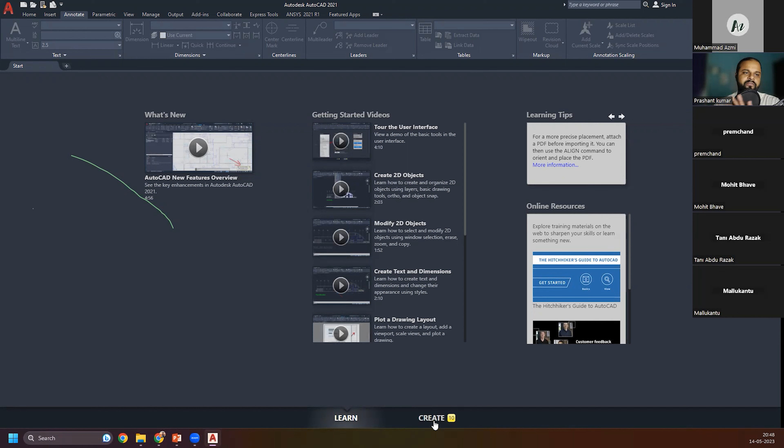So this section is basically towards your learning capabilities. If you want to start learning, you can just go to this section. Otherwise, if you are into AutoCAD to create something, just go to the create panel all the time. So here you can see right now we are in the create panel.

Here on the top left corner, if I click on the AutoCAD logo, I'll get a few options, like start a new drawing by clicking on new. If I want to open any old drawing, I can do that as well. If you want to convert any drawing to DWG, I can do that as well. So these are the few options.

If you click on this AutoCAD logo, you'll be able to see those same things over here as well, like if you want to create a new document, you can do that from here as well. If you want to open something, you can do that from here too. So all these options are here, and here also.

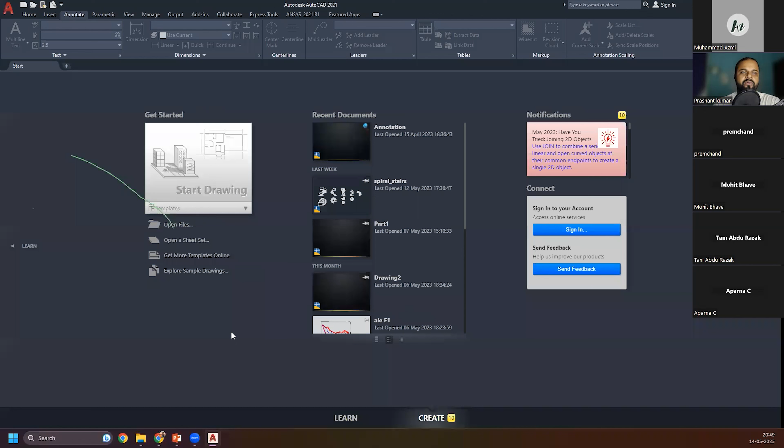Now, what happens in the case of AutoCAD drawings, in case of 2D drawings, is it works with a template. By default, AutoCAD provides lots of templates for different kinds of industries. Just below your start drawing panel, there is a template panel. If you click on this small dropdown arrow, you'll be able to see all the templates provided by Autodesk by default.

These templates are basically inclined towards different kinds of industries, like a few templates for the architectural industry, a few templates for the civil industry, a few templates for the manufacturing industry. So there are multiple predefined templates.

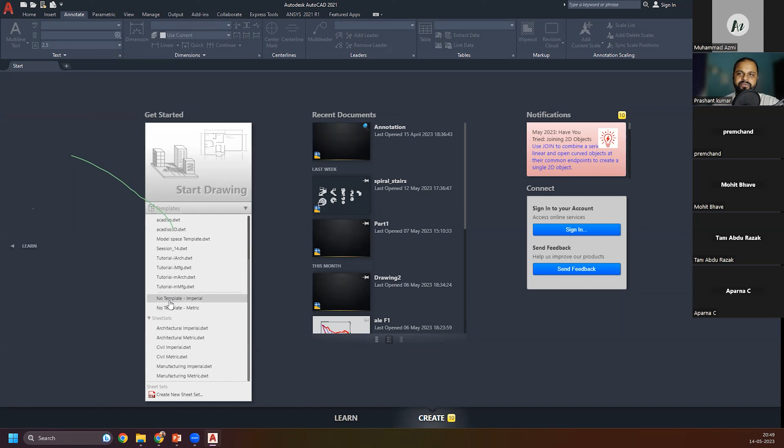Now, if you're not sure which kind of drawing you are going to start, or which industry you're going to start your drawing in, then you can also select no templates. There are two no-template drawings, one for imperial units and one for metric. When we talk about imperial, this means feet and inches. When we talk about metric, this means meters, centimeters, and millimeters.

So if you are in an industry that works with imperial units, you can select this one. And if you are from a metric industry, you can select this one. So let's select this one to start a new drawing.

I will select this one. And the moment I click on the metric template here, you can see my new drawing has just been launched. So this is my drawing that just launched, and it's completely empty.

As you can see, my background is also black. Maybe somewhere you had seen some AutoCAD tools having a white background. That is completely customizable, guys. You can completely customize that thing, so don't worry about it. Right now I've just customized this for the black background.

Right now here you can see my cursor as well. The cursor size can also be customized. As you can see, there are two lines in my cursor and a small rectangle at the center. This is my default cursor inside AutoCAD.

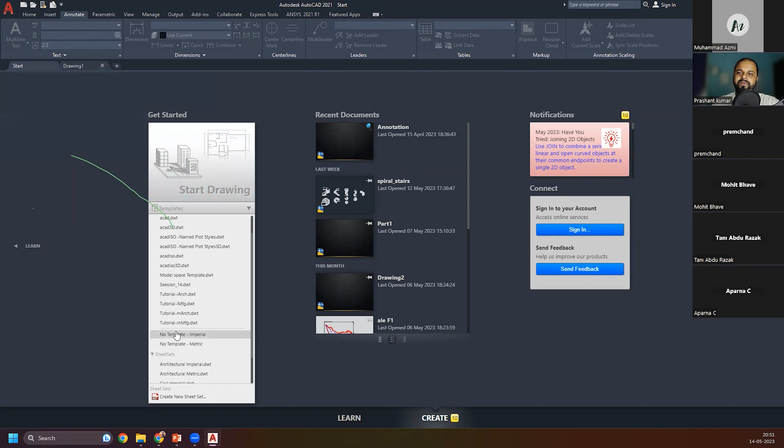The moment I clicked on the template here, you can see drawing one just got active. So this is my drawing. And all the time, if you want to go back to your start panel, you can go that way as well. Here you can see drawing one is right now active. If I click once again on the new template, it will create another drawing here. I will close this one because I don't need it. So we are into drawing one space right now.

Just a second, guys. In every AutoCAD, whenever you launch your drawing, you'll be able to see these spaces. Can you see that? Can you guys see my screen? Comment in the chat box, guys. The reason I'm asking all the time is because it's really late, it's time to sleep, so I just want to make sure everyone is awake in this complete session, in this complete workshop.

So here you can see, right now the moment I clicked on the template, I moved on to this model workspace. We are inside this model workspace. And there are two more workspaces over here: one is layout one and the other is layout two. Whatever is started with this word layout. This means that is the paper space, and that space is to plot your drawing, to prepare your drawing for printing, for plotting.

So the basic design and drawings, all these stuffs, we are going to do only inside this model space.

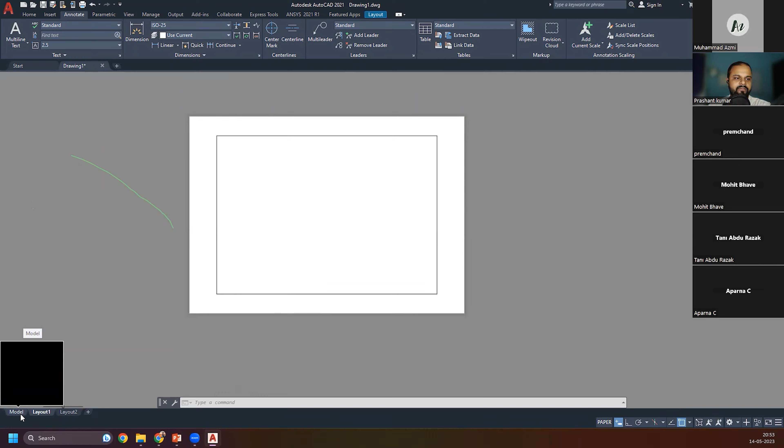Here you can see inside this model workspace. And now on the top, you can see all tools are active right now. It's all because we had an active drawing with us, so all the tools are active right now.

Here you can see there are multiple tools and it's really scary. When you come into AutoCAD the first time, you will see lots of tools and get confused where to go, where to start, because there are lots of tools over here. But it's really easy, guys, don't be horrified by seeing such kind of user interface. It's really simple to use. You don't even need to know about any of the tools. You can completely control your AutoCAD using the command bar. And when I say command bar, don't get confused that I'm going to use programming or some other steps. There are small shortcuts that we can use.

Now Mohit is asking what is the use of these layouts. So I told you these layouts are for the printing purpose. I will explain you as we move forward in this workshop.

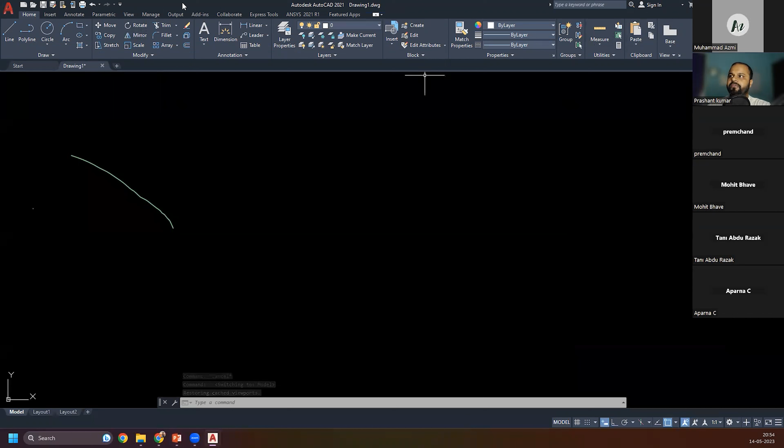Okay, so we were talking about the user interface. So at the top, we got all the tools. Here you can see at the bottom, we got a few more controls, like we can control a few of the settings from here. Like if I want to turn on my grid mode, I can turn it on, I can turn it off like this. Here you can see this is the grid mode that is active on my drawing. And grid snap, we can turn it off, turn it on. So these are the settings. There are lots of settings over here that we can control.

Then here we got the model space, layout space. So if you want to navigate across these spaces, you can just click on the different spaces and you will be able to get inside that. So all the drawings, all the designs, you will be doing inside the model space only.

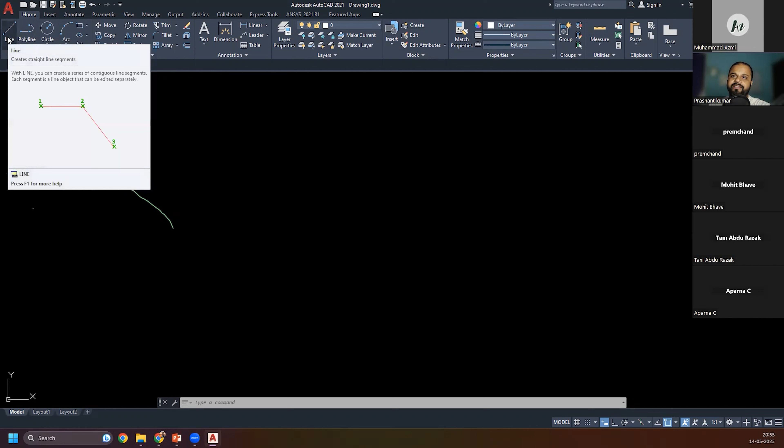Now, here you can see at the bottom of your drawing space, there is a command bar. Here you can see it's asking me to type a command. So this area is really very important. So whenever you are using AutoCAD, try to look at this area, what it is asking me. For example, let me activate the line tool. So you can activate all the tools on your user interface just by making a single left click. So here you can see whenever I'm hovering over the tool and staying for a few seconds, it is already giving me lots of information. So that is also a great way to learn all these details.

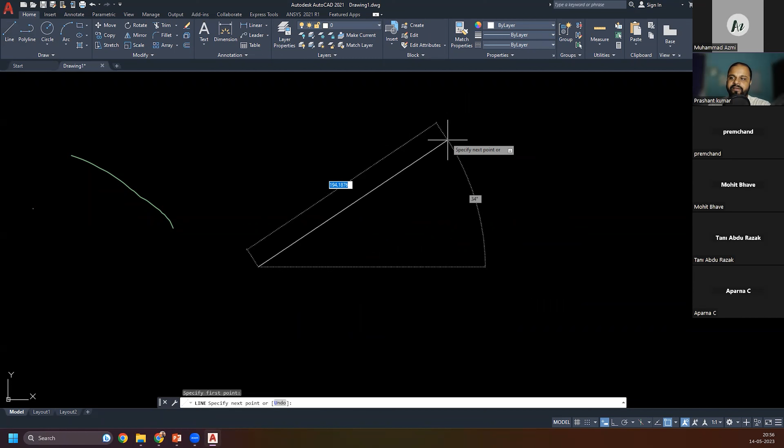So as you can see, the moment I activated the line tool, you can see in the command bar what it is asking me: specify the first point. Line tool is active and the moment I click, I have specified the first point. Now to create a line, I need to specify 2 points. So now it is asking me to specify the next point. The moment I click, I specify the next point. I will click, I will specify the next point. Here you can see the moment you are done, you can just press escape on your keyboard.

Escape key, guys. Escape key is the key to come out of any tool. Also, you can make a right click and click on enter to come out of the tool. But escape is very handy. All the time you have to keep your fingers on the escape key. And whenever you are done with the command, you can just press escape to come out of the tool. There you go. So I just created this shape.

Now, as you can see, I am zooming in and zooming out on my user interface, and it's all possible because of my mouse scroll wheel. And guys, don't try to do AutoCAD designing or drawing using the trackpad on your laptop. It's almost impossible, I will say. Maybe with a few years of practice you can do that, but that's not a really efficient way to do designs inside AutoCAD. Always use a good external mouse. So here you can see if I'm scrolling my wheel forward, backward, I'm able to zoom in and zoom out on my drawing.

Also, if you want to pan your drawing, like if you want to move your drawing across your screen, you have to click on your mouse wheel, and once you click on your mouse wheel, you will be able to see this hand icon, that is the pan icon. The moment you keep pressing that wheel, you will be able to move your drawings across your drawing space. Here you can see, like this. It's very easy.

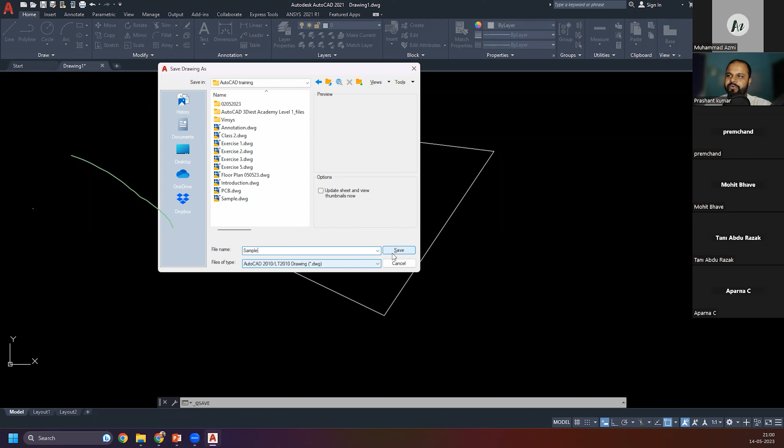Now click on save. Since I already had the sample file, I think yes, it already had, I will just press yes to replace that drawing. And here you can see it got saved and the file name got updated. So we just saved our first AutoCAD drawing that we had just created. So this was about the user interface of our tool, right?

And on the top tool panel over here, you can see in the home tab we got different kinds of tool panels separated by these borders. We got the draw panel where we will get all the tools related to drawing anything. We got the modify panel to modify anything. We got the annotation panel to annotate your drawings, for example, dimensioning, putting some text or something like that. We got the layer panel, block panel, properties panel, group panel, utilities panel. So there are lots of things that you will learn over time.

So don't worry about that at this moment, because if you want to learn AutoCAD, it will take you around 24 hours of full training. This tool cannot be learned in a single hour of workshop, but still if you can get a good introduction to this tool, you will get a good path to start your journey with AutoCAD.

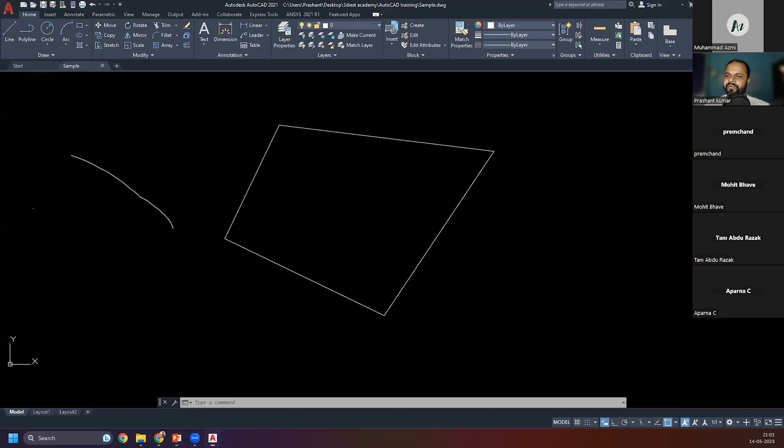inside our sample file. Before that, I will select this thing and delete it by using my erase tool. Here you can see. Now we want to draw two concentric circles. It's simple, guys. We have to go to the draw panel to draw anything. So we'll go into the draw panel, and here you can see we're able to find our circle tool. Just click on that tool to activate your circle tool.

And the moment you click on the tool, you have to look inside the command bar to see what it is asking you to do now. As you can see in the command bar, it is asking me to specify the center point for the circle. So I will make a single click to specify the center point. There you can see.

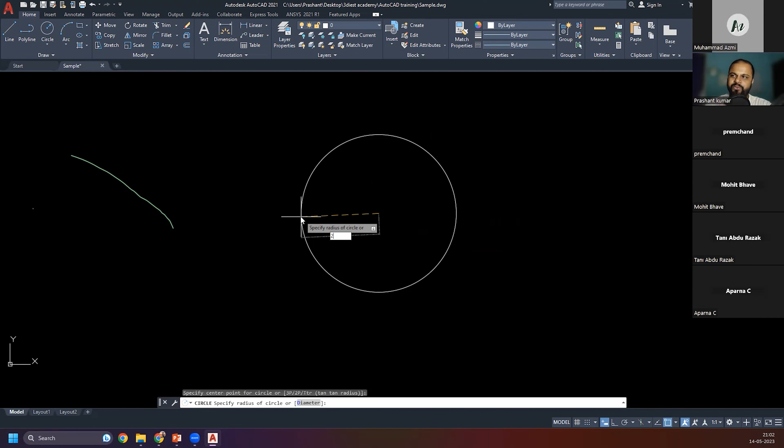Now it is asking me to specify the radius of the circle. So definitely, guys, the diameter was 4 millimeter, I told you, so the radius will be definitely 2. So I will press 2 on my keyboard and will press enter. Boom, circle has been created.

I will just zoom in, here you can see. This is my circle that we had just created. I'm able to pan that as well. So if I select this circle, it will highlight the center point, and it will highlight all the four quadrants of this circle. You can call these quadrants, you can call these snap points, whatever you want to call. But this is the center point for the circle, right?

So we just created this circle, and I told you, if you want to come out of any of your commands, just press escape on your keyboard and you are done. Now we have to create one more circle, and that is of diameter 7. Here you can see diameter 7. So again, we'll activate our circle tool from over here, and I will try to find the center.

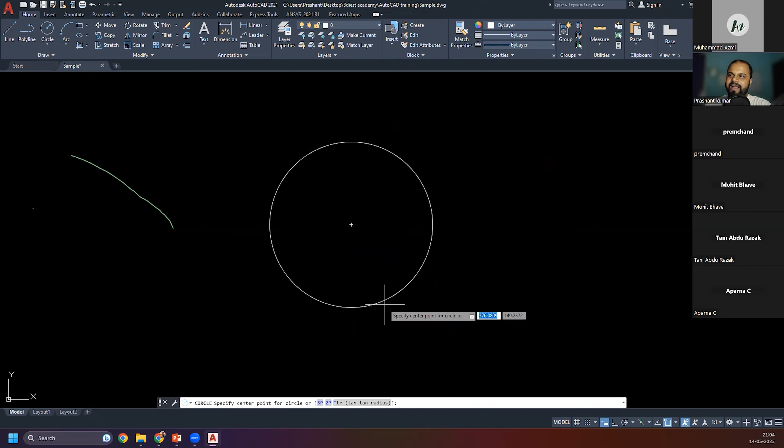Here you can see I'm not able to find the center because there is a tool for it that is not active at this moment. AutoCAD is intelligent; it should automatically suggest you the center point, but it is not suggesting me, right? So whenever I'm highlighting the borders of this circle, it is highlighting the center as well. So now I can just move near my center, and it will automatically snap onto that point. And the moment I feel it's snapping onto the center of my circle, I can just click and make another circle.

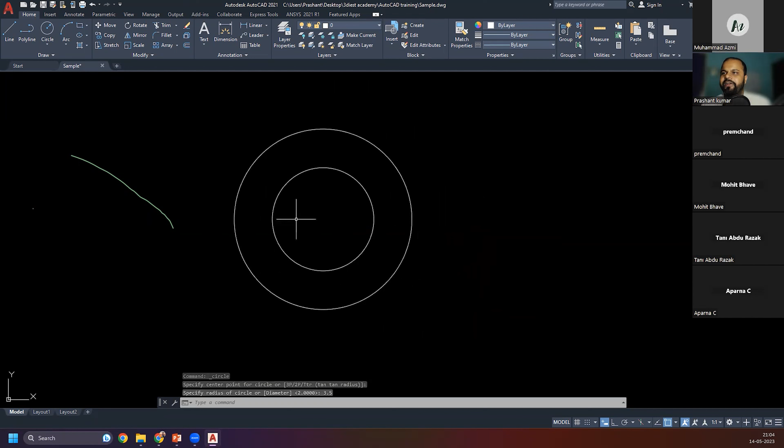And that is of 7 millimeter diameter, so the radius will be 3.5, and we'll press enter. There you can see. So we have just created two concentric circles. One is 7 millimeter in diameter. One is 4 millimeter in diameter. And how to make sure that these diameters that we created are correct?

So there is a way, guys. Just select the object that you want to check. To select your object, just click on the object. Here you can see I just selected it. Then just press Ctrl+1 on your keyboard to open the properties of that particular object. So I will just press Ctrl+1, and here you can see the properties panel just opened. And inside the properties panel, I can see my diameter. It's 7, radius is 3.5.

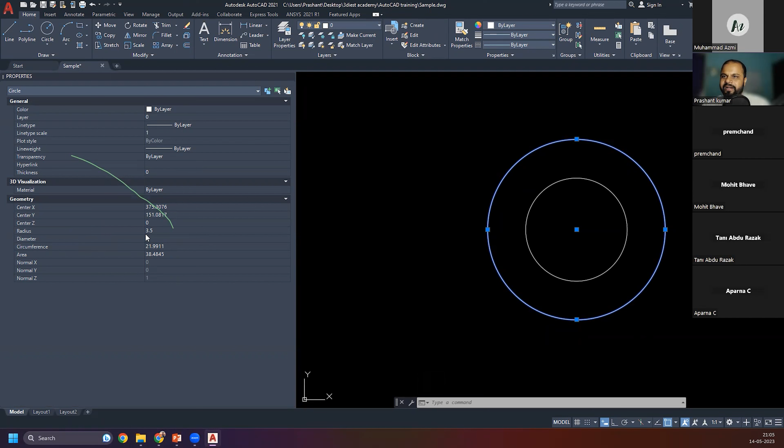Now press escape to unselect that. Now select the other one. Here you can see for this circle, the radius is 2 and the diameter is 4. And if you want to close this properties panel, use the same keys on your keyboard, Ctrl+1 again. Here you can see, like this. It's simple. It's really easy to do these things inside AutoCAD.

And I can see someone is asking, how do we find the zero axis system origin? There is no need to find the zero axis system origin, guys. I told you, AutoCAD is like a paper. You can start from any point of your screen, right? You don't need to find the zero origin like we used to do in other 3D CAD software. Just start your drawing at any point on your screen and start doing the things. There is no need to do that stuff when you are just starting AutoCAD.

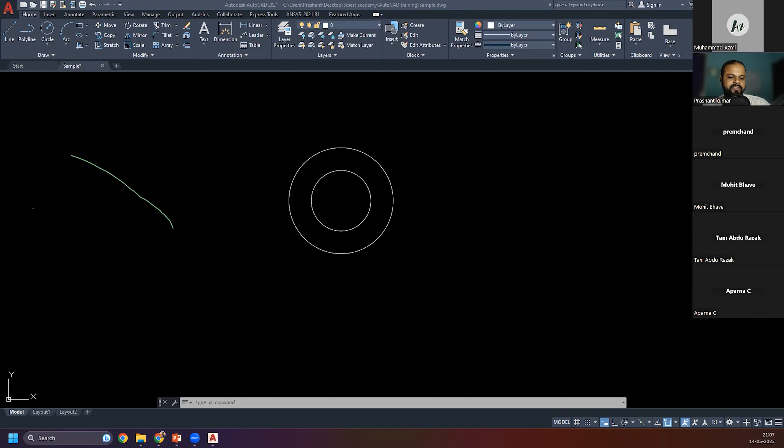Here you can see we have just created these two circles, right? Now, the next thing that we had to do is we had to create another straight line, as you can see over here, that is 3.5 millimeter from the bottom of this center of the circle. Here you can see 3.5 millimeter at the bottom. We have to create a straight line, then another straight line at the bottom, that is 2.5.

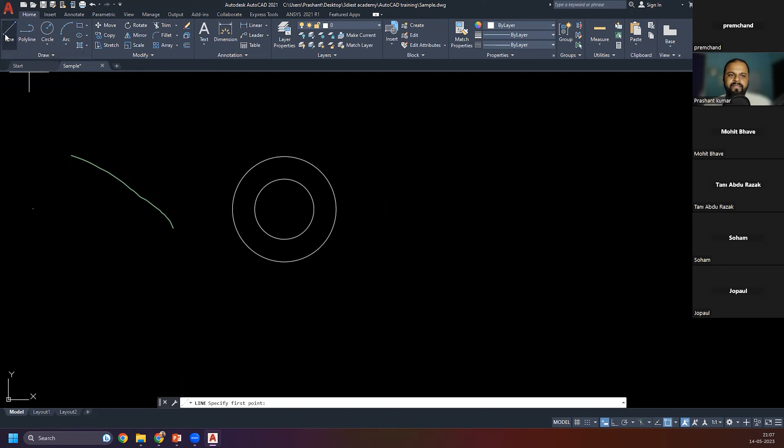So for these two lines that we are going to create, we are going to use a simple process. And what is the length of the line, guys? I forgot to check. It's 10, right? It's 10. So first thing first, I will activate my line tool. And all the time I told you, if the view zooms out, how to fix the view.

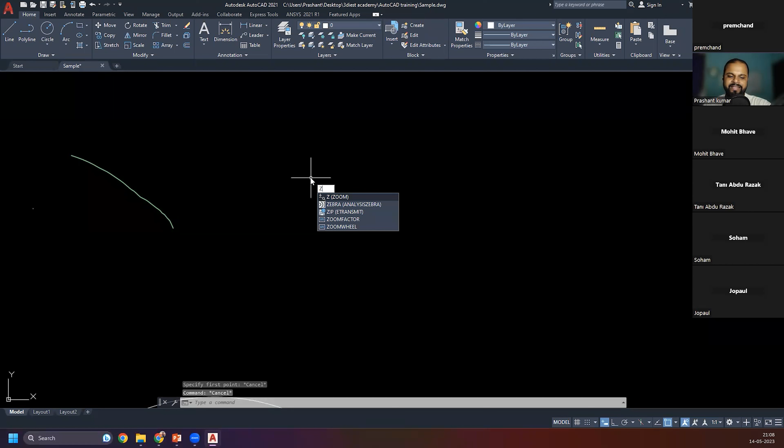Someone is asking, if you had missed your drawing from your screen, how to bring it back on your screen, right? That's a really good question, because when you are starting AutoCAD, that's the biggest problem. So just press Z on your keyboard to activate your zoom tool, press enter. Then press A to zoom all. Whatever you had created on your screen, it will get zoomed all.

Here you can see we got the things highlighted over here. Now we can zoom it in like this. So just zoom, enter, A, enter, like this. It's easy. So now we have to create a line of 10 millimeter length. So I will activate the line tool from over here.

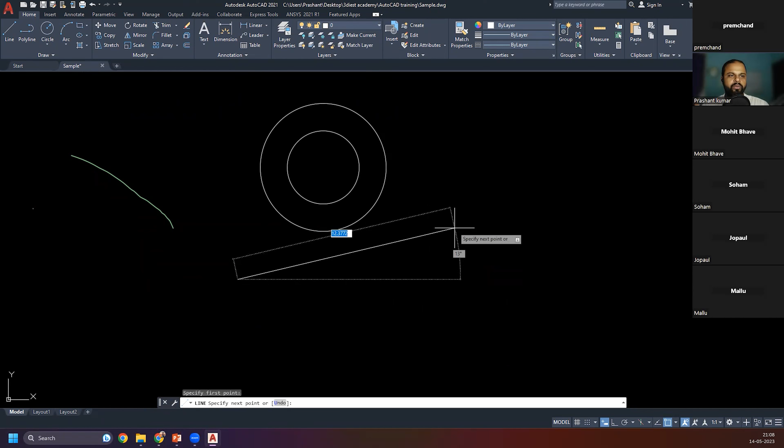The moment I clicked on the tool, it is asking me to specify the first point. I will select the first point, and I want a perfectly horizontal straight line, but at this moment I'm not able to do that because it's going on some angle. So there is a tool inside AutoCAD to make perfectly horizontal and vertical straight lines. So you need to activate that tool.

So I will activate this tool called ortho mode. Ortho mode is the tool that will help you to create only horizontal and vertical lines. The moment I activate this tool, I am able to create only horizontal and vertical lines. It's not moving on any particular angle. So now I want this line to be 10. I will just type 10 and press enter. There you can see, I just created a line of 10 millimeters.

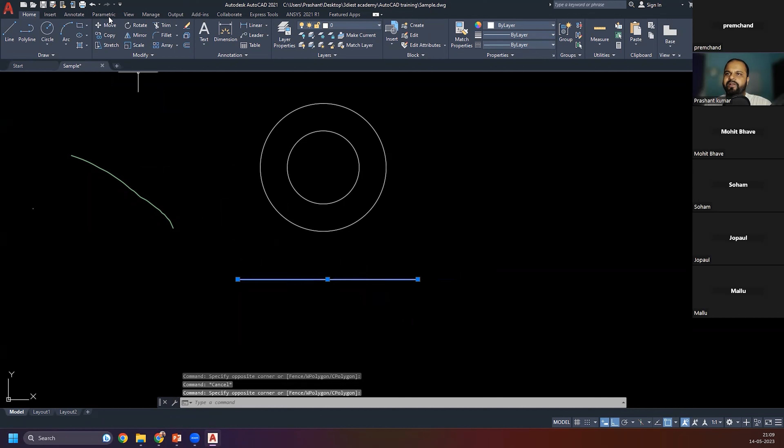Now I want this line to be touching this circle at this bottom position. So I will select my line just by making a single click, then dragging my cursor, and it will make a green window like this and select my line, right? Then I want to modify this line to touch onto this circle, so I will activate my move tool.

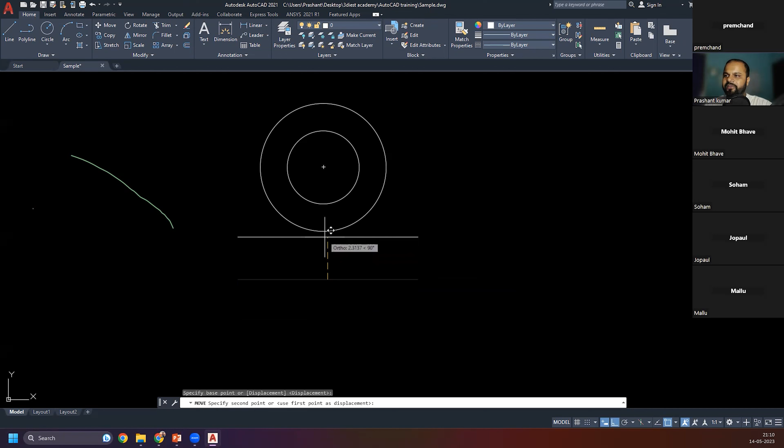Now I will specify the move point. Whenever I hover my cursor onto the midpoint of the line, it automatically gives me the suggestion; that triangle green icon is for the midpoint. So I will select that. Then I will move this to my circle's bottom quadrant. It automatically gives me the suggestion that the rectangular symbol is for the bottom quadrant. So I will click on that.

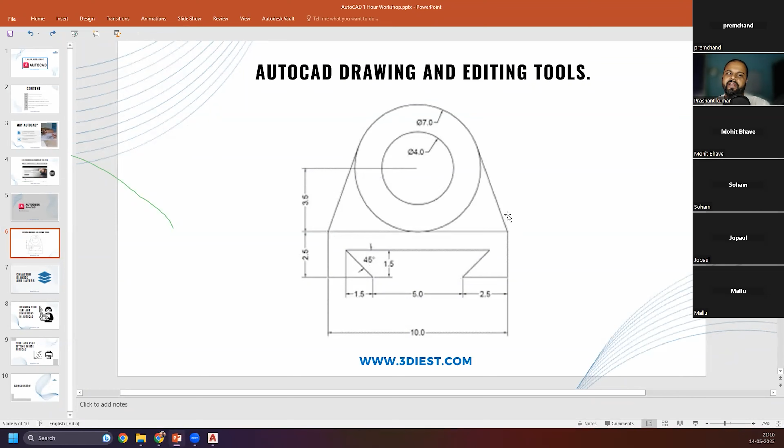There it goes. I just moved my 10 millimeter line from here to here because we wanted this line at this position. Now I will check my drawing: I want these connected on the left and right with two lines. So I will again activate my line tool and select the first point of the line as this corner.

Now the other point I want at the tangent of this circle. The tangent is basically a line that is touching the other object. So how can we do that? Press shift and make a right click, and then you will be able to see your tangent tool.

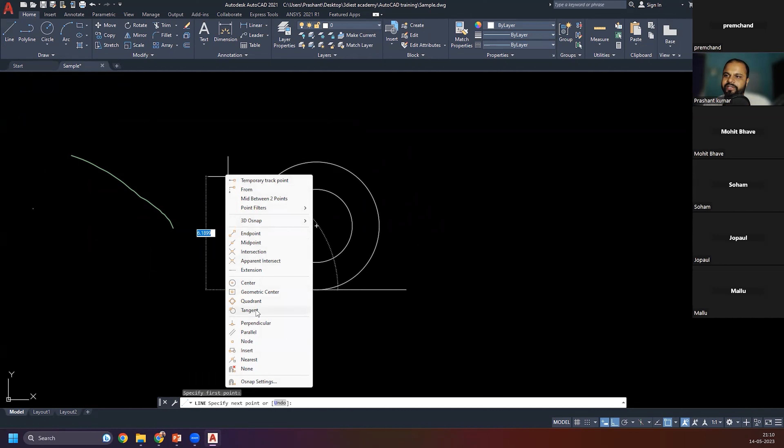So just activate that. And now if I try to go over there, it will automatically snap to the tangent point, here you can see. And the moment I click, it will make a tangent. And the moment I am done, I will just press escape on my keyboard, and I am done.

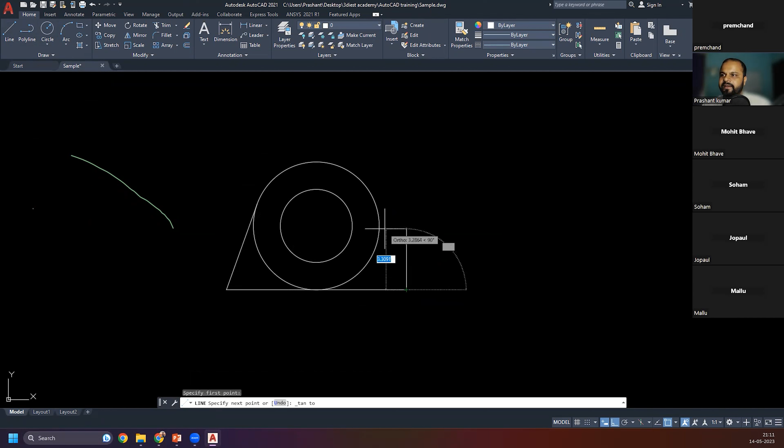Again, activate the tool, select your point, press shift and right click and select tangent, then try to move near to your circle and then click like this. So it's perfectly tangent to your circle. So this way we have created these two simple lines.

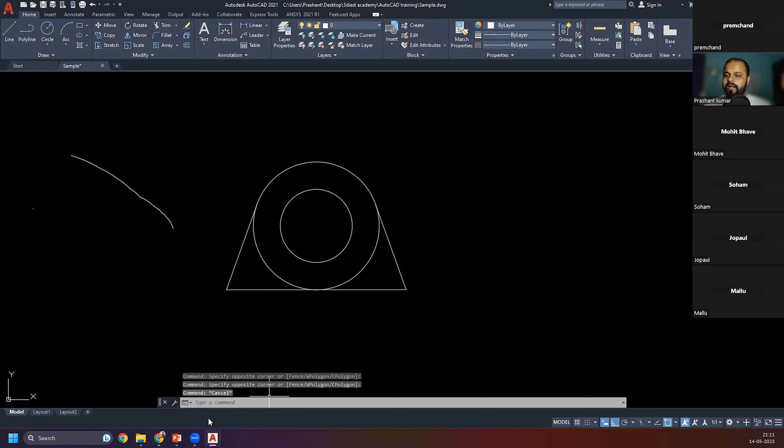And I told you all the time, whenever you are using any of the commands, any of the tools, try to look into your command panel at what it is asking you. Because if you move your eyes somewhere else, you will not be able to perform the commands correctly. The only way is to keep looking into your command panel. Right? There you can see we have just created this.

Now we need another line 2.5, then another line like this. So let's do that. I will activate my line tool. I will make a line of 2.5 like this. Then I will go in this direction 10, and then again towards the top 2.5, and it's closed. Now there are a few more lines, like we need a line 1.5 millimeter from the bottom, and then these lines, right?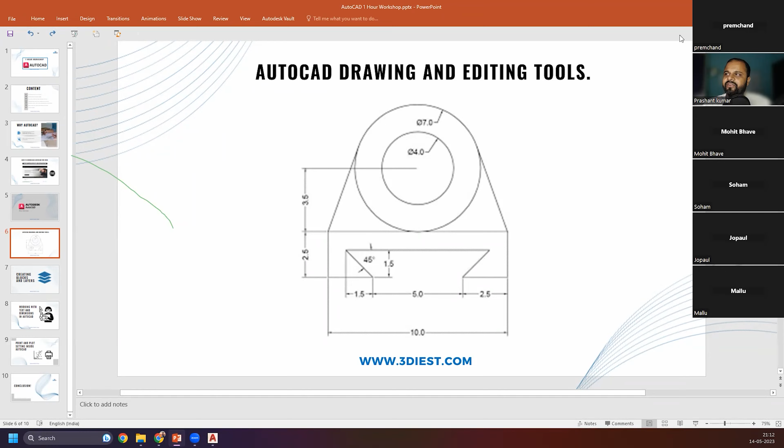So to make another line at 2.5 millimeter from the bottom, we are going to use a new tool called the offset tool. What the offset tool really does is help you create parallel lines at a particular distance. The moment I activate my offset tool, the first thing it asks me is to specify the distance, like how much distance I want to get a line. So let's write 2.5 and press enter.

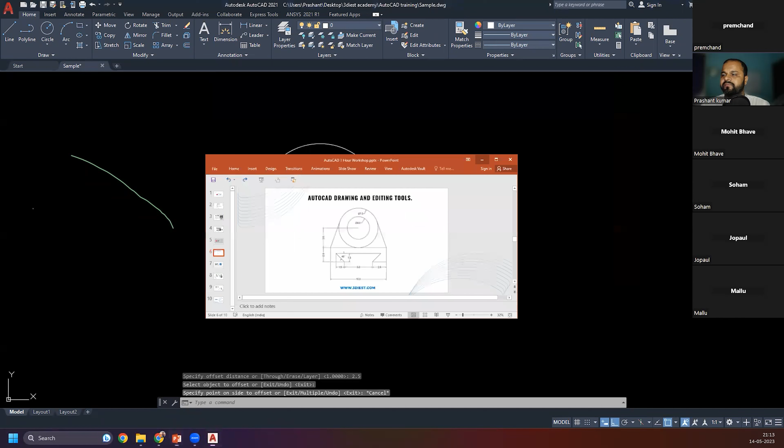Now, which object do you want to offset? So this is the object. Now, in which direction? Whether you want to offset in this direction or in this direction. So I think we had taken the wrong distance first. The distance was 1.5. Sorry. So again, activate my offset tool. We'll give an offset distance of 1.5. We'll select the object and we'll offset it like this. Very good. Right. So don't worry about that. We're going to trim out some of the extra areas, but before that, we'll first create our line.

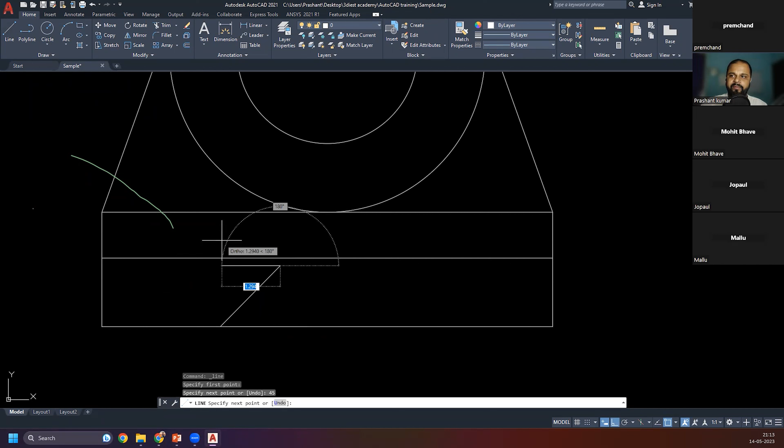Now here you can see the next thing is that there is a line like this at a 45-degree angle, and the same thing mirrored on the other side as well. So I will activate my line tool and select the point, and here you can see I want to create this line at a 45-degree angle. So I will press tab on my keyboard to move to the angle section. Then I will write my angle and press enter. But here you can see it's not touching the line. So I need to extend this line so it will touch.

So we'll go to the extend tool. We'll click on the line to extend it up to the next point. So that's really easy. Now move this onto this area. So I will move this one from here to here on this corner. Then again, I will select that and move it from here to here. I need to check how much the distance is, 2.5. So I will just write 2.5 and we are done.

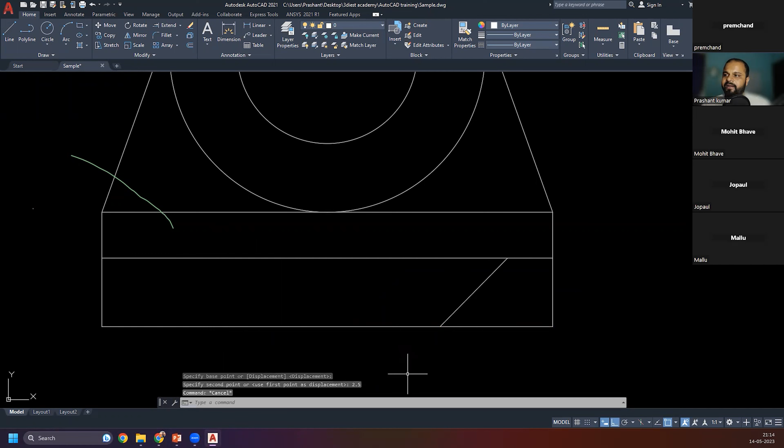Now we need the same thing on the other side. So for that, we're going to use the mirror tool this time. We are not going to create a line again. The mirror tool will create another image of the same line on the other side. So I will select the line. I will activate my mirror tool. Here you can see it is asking me to specify the mirror first point. So the center point will be the mirror first point, and this bottom point will be the mirror second point.

And whether you want to erase the source object. So this is the source object. I don't want to erase this one. I want to keep this one as well. So I will press no. Here you can see we have just created the mirrored object. Now, if you see this drawing, we don't need this area over here. So we need to trim that. So we'll activate the trim tool, and the trim tool is inside my modify panel.

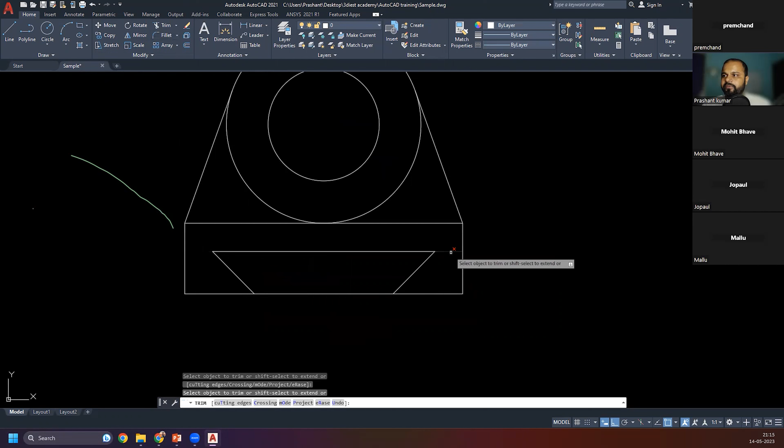Here you can see this is my trim tool. We'll activate the tool, select the regions that we want to remove, just click on that, and it will be gone.

So guys, here you can see we have just finished our first drawing inside AutoCAD. Any questions up to this point, you can just go and comment in the chat box. Now, since we are running out of time, here you can see we have just finished this AutoCAD drawing.

So our next topic is creating blocks, like how we can create a block from this drawing. Right now, if I'm trying to select that, here you can see all the objects are separate. If I'm selecting the circle, it's separate. If this circle is separate, this line is separate.

So in AutoCAD, we can convert the complete thing into a block. How we can do that? Just select everything that you want to convert to a block, go onto your block panel, and that is over here, then click on create block.

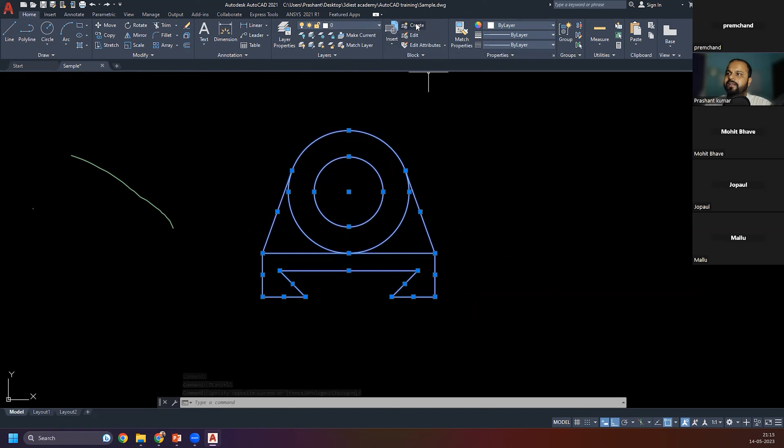There you can see, specify the name of your block. Let's say I'm writing 'sample.' Now you need to specify the pick point of the block, so I will select this center point as a pick point. There you can see, and I will press OK.

Here you can see, now this is the block. If I'm trying to select this one, I'm selecting everything, and also it's being stored in our AutoCAD database.

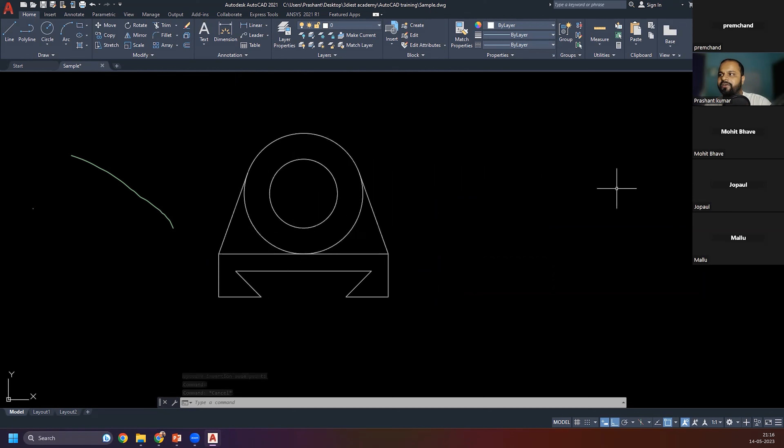So all the time, if I want to insert the same thing on this area, we can just click on this insert panel. Here you can see we got the sample file, we can keep it like this. So we had created a block that we can reuse multiple times, 100 times, 1,000 times in our drawing, since we had already converted that to a block. That's the benefit of block inside AutoCAD.

So to move forward to our tools, what I will do is explode this block. Exploding means I will again change that to a simple object of multiple entities. This is still a block, but this one I had just exploded.

Right now, what is layers, guys? Here you can see this layer properties panel over here. From over here, we can create different kinds of layers. If I will expand it from here, or open the layer properties panel, here you can see right now we have only one active layer.

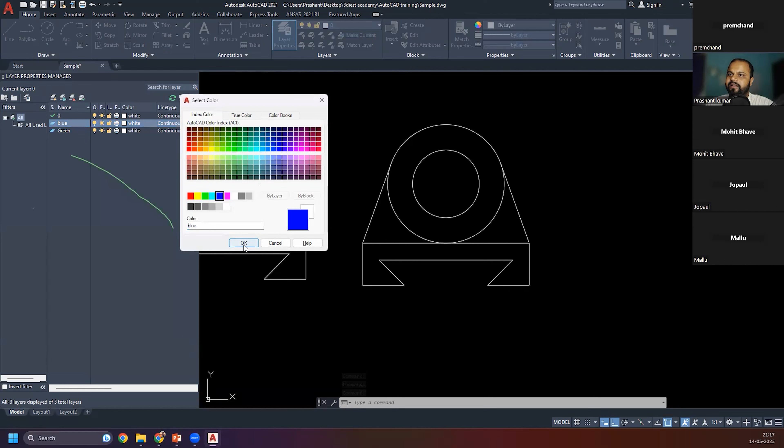So if I want to add more layers, I will just click on over here to create a new layer, and here you can see I just added a new layer. Let's write 'blue' and add one more layer 'green' like this. We had just added two new layers, and we'll change the color for those layers, like blue, and this one is green.

Now, if I will select this object and try to open the properties panel by pressing Control 1, here you can see the layer for right now is 0. So all the things that we had selected for all these objects, the layer is right now 0 layer, right? So I will close this properties panel.

Now select this circle only, internal circle, and change the layer to blue for this circle. So you can see whatever layers we had created, and we had specified properties for that particular layer like color and other stuff. So whenever I'm changing the objects to those layers, it will be changed to the properties of that particular layer.

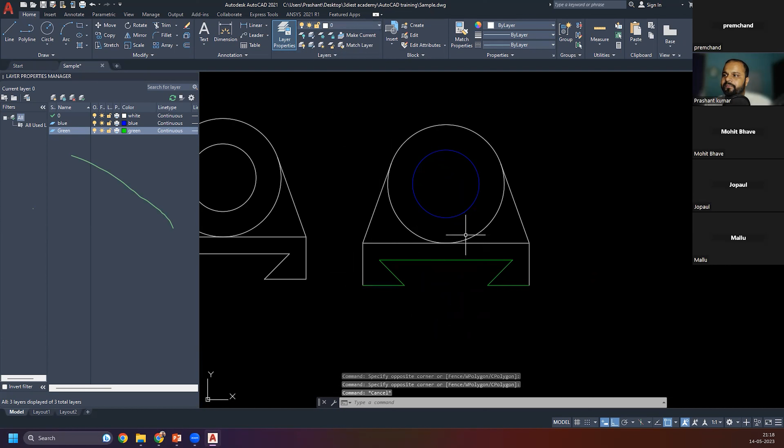So these objects are in 0 layer having color white. As you can see, in 0 layer color is white. This object is in blue layer, and these objects are in green layer.

So what is the benefit of having layers? Let's say if you want to turn off these green layer things, you can just click on this bulb icon, and those will get turned off. But those are not being deleted from your drawing, they are still inside your drawing. Only thing is we can control the visibility of our entities inside the drawing using the layer tools.

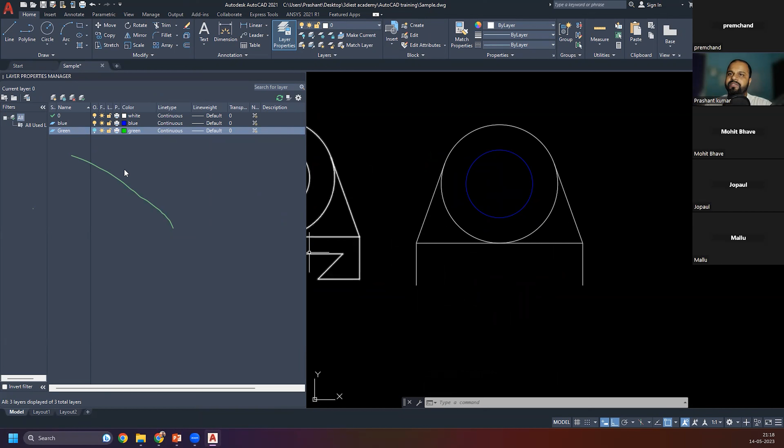So again, if I want to turn it off, I can do that. This way we can completely control the presentation of our drawing. So this is the benefit of having layer tools inside AutoCAD.

So we had learned about how to create blocks, we had learned about how to create layers, and all the time, if you want to insert the block again, you can do that. It's really easy, right? Now we had learned about creating blocks and layers.

Now, learn about working with text and dimensions inside AutoCAD.

So here you can see, if I want to dimension this drawing, I can just activate my dimension tool from here. I have to specify the first point, then the second point, and then I can drag it like this to specify the dimension. So these sizes are completely customizable, like the dimension here looks very big.

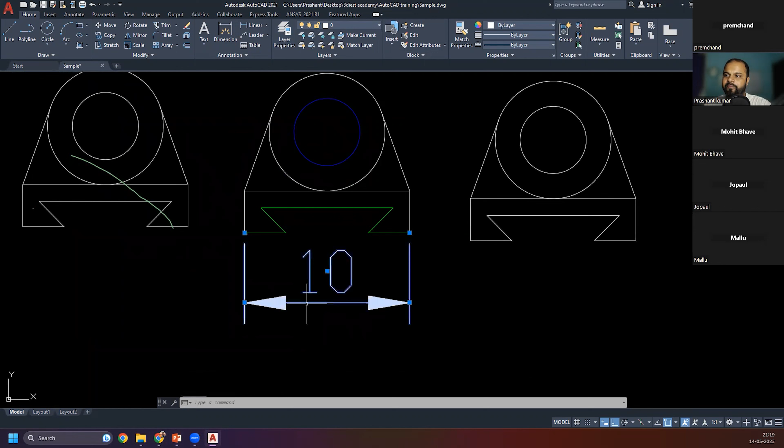So what I will do is select the dimension, press Control 1 to see the properties, and bring down the dimension scale so it will look good. Here again, now it's looking good like this, right?

Now we can also specify the diameter of the circle. Activate your dimension tool, or move on to the annotate panel. In the annotate panel, there's a specific tool for the circle, here you can see diameter. So I will select the circle diameter, and I can specify the diameter like this.

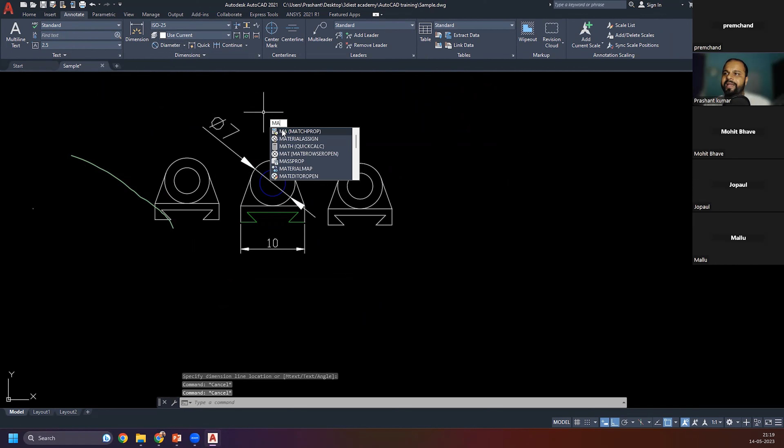Now I want this size also to be adjusted. So there is a tool called MA, to match properties, like we do in Excel or some other tool. We can do that like this.

Also, if you want to put text, there is a tool for that. Just activate your text tool. You can write the text as well, like sample drawing. Let's write sample, and once you are done, just press escape. Yes, and you are done. You have just created a text that says sample.

And again, guys, you can completely customize this text, the font size and everything for this tool. It's completely customizable, you can do that.

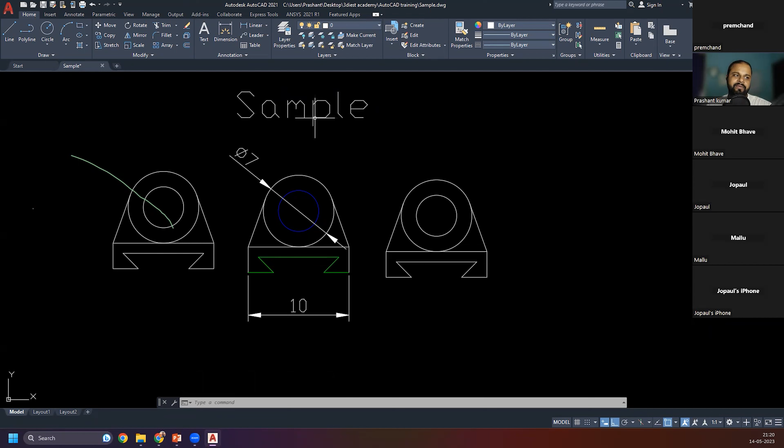So you can see we had just created a text, we had created an annotation for this drawing, and we had applied some layers. We had also converted that to a block. So these are the steps we had just practiced.

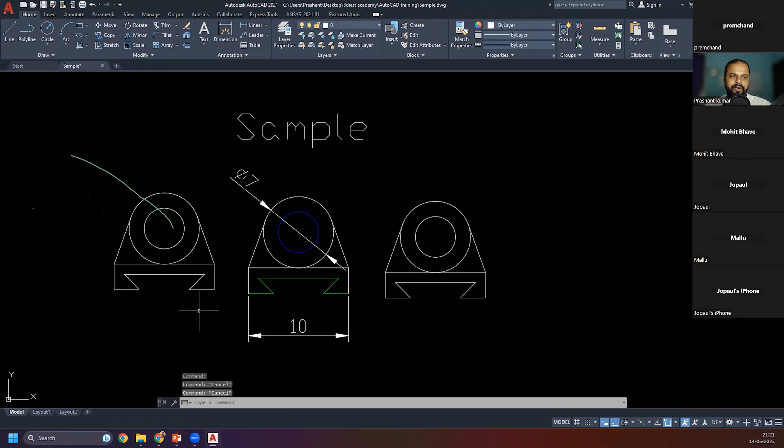Now let's move on to our other steps, like how we can print and plot this inside AutoCAD. If you want to print and plot, we have to move on to our layout space. So here is the layout space. If I delete all the necessary steps, let's say this is my paper, and if you want to plot on this paper, the first thing we have to do is create a paper space where we'll be able to see our drawings.

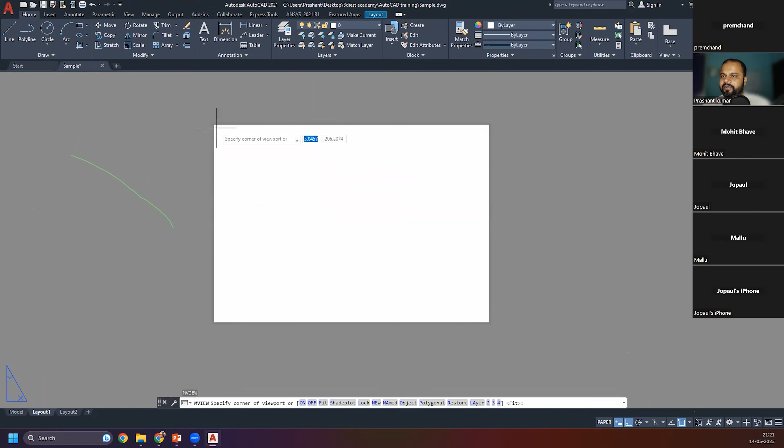For that, there is a command called MV. If I activate my MV tool, I have to specify my corners from where to where I want to use. So from here to here, and the moment I clicked, I created that area. Here you can see it's showing me the drawing. If I double click on this area, I'm able to zoom in and zoom out on this drawing.

But because I want to control the scale, I can control it from over here, at the right bottom corner. If I want to make a scale of, let's say, 4:1, I can do it like this, or maybe some smaller scale, or maybe some bigger scale, maybe 8:1, like this. I think 8:1 is bigger, let's make it 4:1. So you can see. And the moment we are done, just a second guys.

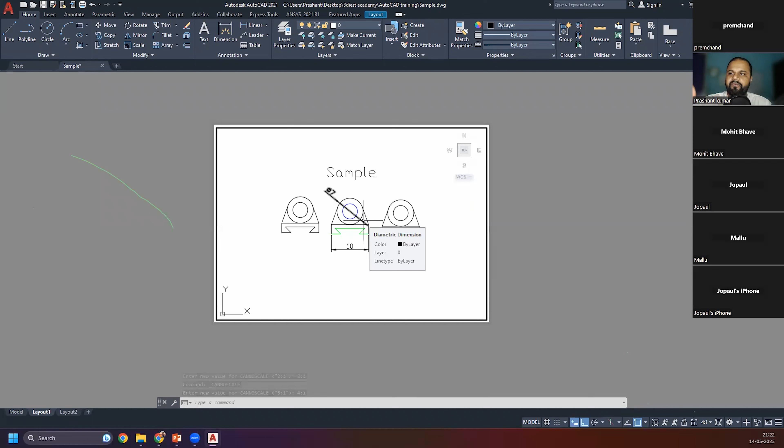What we can do is double click outside our space, and here you can see we are done. We have just made our drawing ready for print.

Now, if you want to plot this complete drawing, there is a command called plot inside AutoCAD that you can activate from the output panel. Here you can see this command called plot. Just click on plot, and choose how you want your drawing to be, whether you want to print on paper or convert it to PDF. Let's say I want to convert it to PDF, so I will select this as PDF.

Now the paper size, on which paper size you want to print your drawing. Let's say I want to print it on A3 paper, so I selected A3 paper. Now what do you want to print? So here I will select layout.

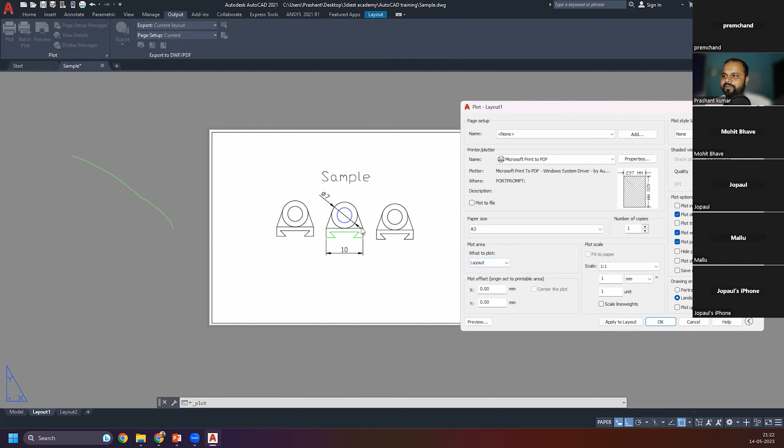Layout is what I want to print since we're inside the layout space. If I click on the preview panel, you can see it's not fitting onto my paper right now. So I'll press escape again and I'm back to my tool, making sure it fits onto the paper.

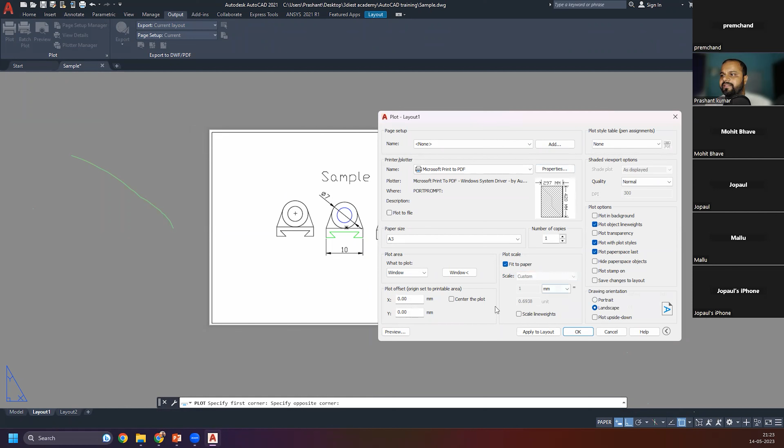To fit it onto the paper, we had to change the plot area, so we'll change that to window. We'll click on this corner, then click on this corner to select the area we want to print, then click on fit to paper like this. If I click on the preview, I'm able to see what we're going to print.

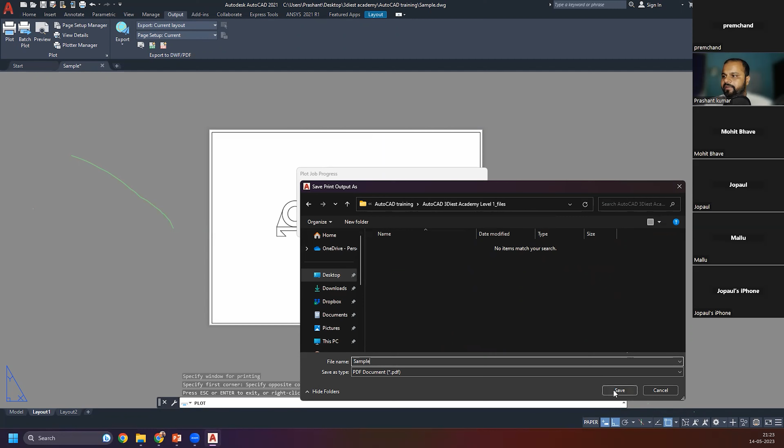The moment I make a right click and click on plot, it will start converting that to a PDF. Let's save this on my desktop, in my folder inside AutoCAD training, and name this one sample as well. The moment I click save, it gets plotted and printed, but as a PDF, not on an actual printer.

Now if I try to open that file, here you can see I just opened it, and here is the file we just converted and created. There it is, a PDF file. So it's really easy, guys, to do these steps inside AutoCAD.

So we had learned about print and plot settings inside AutoCAD. Let me know up to this point, guys, if you have any questions or doubts, or if you want to discuss at this moment, let me know.

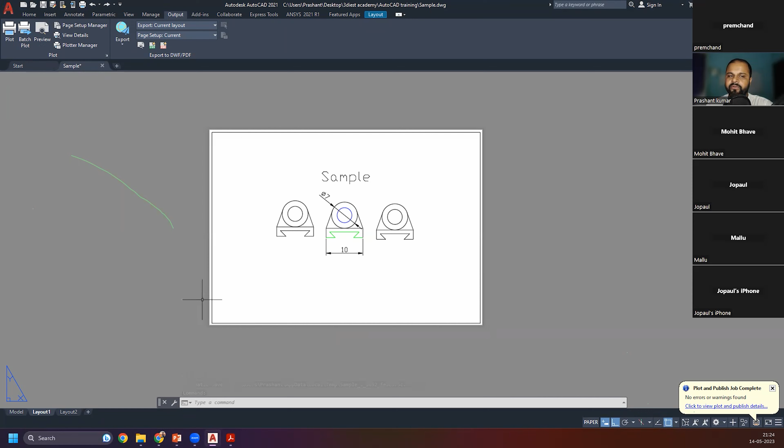You can also move these blocks to the side, for example, let's move this one here and this one there. What happens in the paper space is it will automatically update, because paper space is just a reflection of your model space. The things you created inside model space, you're just making a photo frame of that thing on this layout space.

Whatever change you make inside model space, it will instantly reflect. For example, if I create a line like this, here you can see it automatically reflects on my layout space. So as I told you, layout space is completely for preparing your drawing for printing.

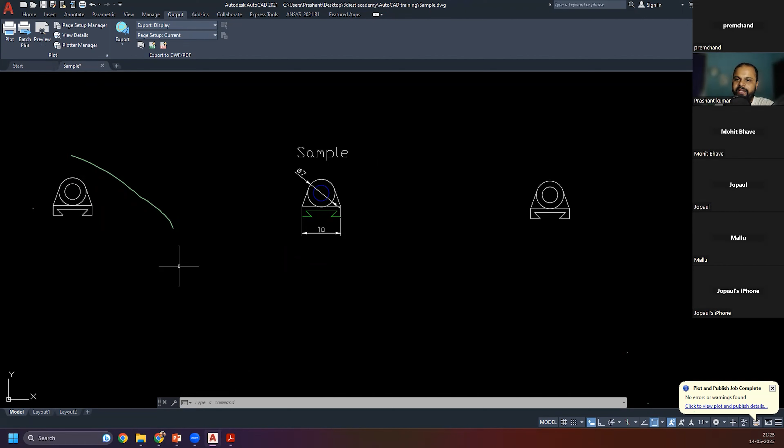I see Mallu is asking about the application of AutoCAD in the industry. As I told you in the beginning, the application of AutoCAD is completely versatile. Since I started working in the industry, I worked as a layout engineer for a chemical company that was installing a distillery plant. I was from a mechanical background, so I took care of plant layouts, P&IDs, piping and instrumentation diagrams.

After that, I joined a boiler manufacturing company where I was into design, designing the complete boiler setup, the power plant setup and everything inside AutoCAD. After that, I moved to an MNC company based in Gurgaon, India.

They were into cement plant manufacturing, and they are the leader in the industry. There I also worked as a layout engineer and equipment detail engineer, where I used to detail equipment drawings and design, for example, chutes, screw conveyors and packing machines for cement. Those are the stuffs we used to do using AutoCAD only.

That company is the leader in the industry, and they still use 90% of their design work inside AutoCAD. They only use 10% of the things in 3D, because in AutoCAD, if you want to propose anything to customers or make quick changes, it's really possible very quickly. But in 3D, you need a certain amount of time to make those changes and adjustments.

Maybe in case of precision machining, for example the automotive field where very precise parts are manufactured, 3D is more effective. But in case of big stuffs, like big layouts, the architectural industry where we're making big buildings and everything, in that case AutoCAD is really helpful.

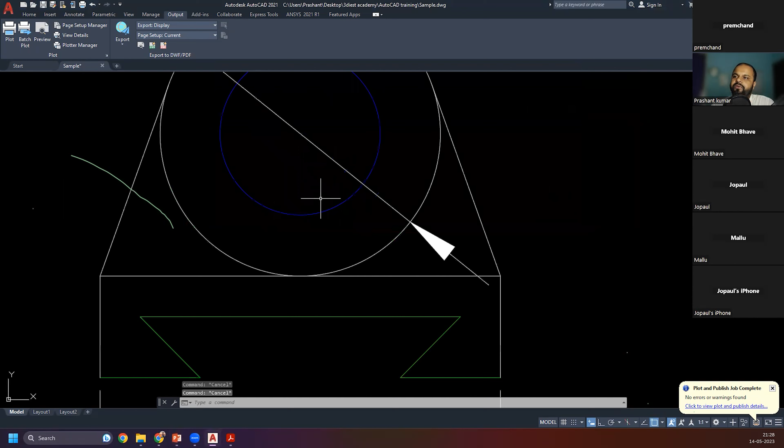Sir, how can we automate the task of printing a drawing in AutoCAD? Painting and drawing? Actually, it's a really good question. Actually, AutoCAD is not meant for the painting stuff, but there is a tool inside AutoCAD. I will show you right now on your screen. Sorry, sir. Not paint, but print. Means whatever commands we give for printing, can we just automate that task? Yes, definitely we can automate that task. Here you can see right now.

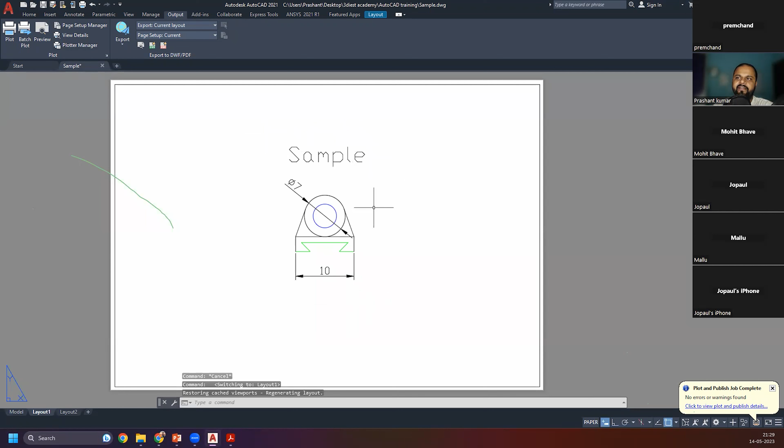So how printing works inside AutoCAD. Printing is basically based on the layout spaces. So right now here you can see my first layout space. I had made this area to be printed, right? Let's make it in the second layout space. I will delete this one and try to create a new view. Let me show you. Here you can see, let's say in this space I just want to print this area. Let's make a scale of 10:1 or something like that.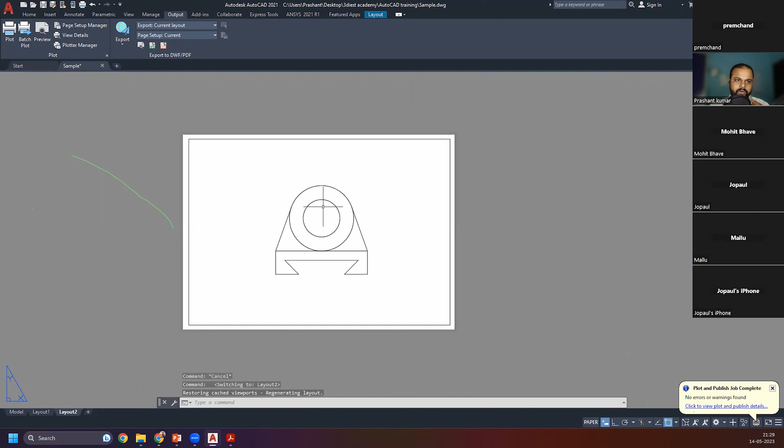Here you can see we got two layouts. In one layout, I'm printing this area. In the other layout, I want to print this area. So if you want to automate this printing stuff, we can use this batch plot option. So I just need to activate my batch plot option. Here you can see, it is asking me for the sheet list that is not active here right now. Publish to PDF. Definitely, I want to convert this to PDF.

And these are the things, right? So here are a few of the settings that we need to work on, like the publish options, what quality of the drawings you want and all that stuff. So let's just ignore those things at this moment. Just click on publish. The moment I click on publish, here you can see it is asking me to specify the file name. So I will just select desktop. I will create, yes.

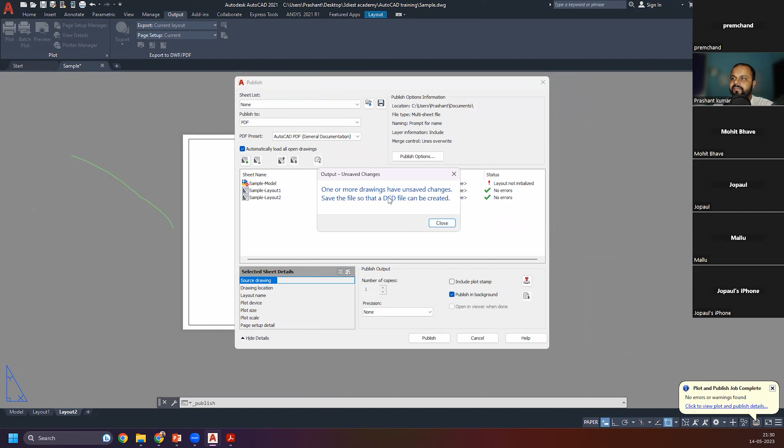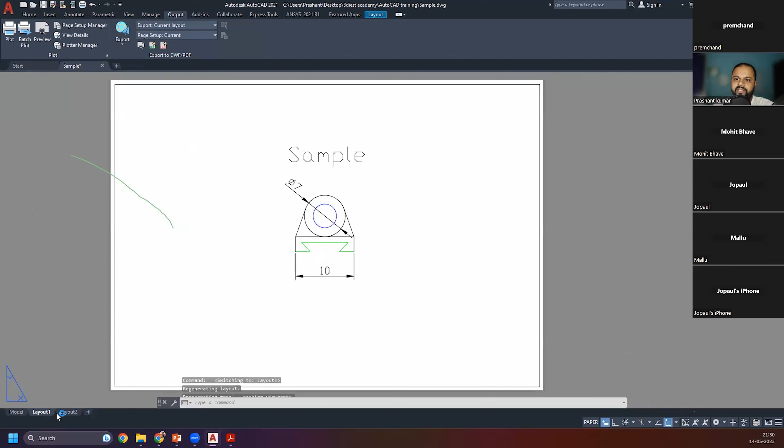Okay, so the moment I clicked on publish, here you can see your printing or publishing job is processing in the background. So you do not need to do anything else right now. The moment it is done, you will get the notification that your publication or printing is done. So if you had a printer connected, it will automatically start plotting layout 1, then layout 2, then layout 3, layout 4, or maybe 20, 30, whatever layouts you had ready for printing. It will keep printing all those drawings on your printer. Also, you can convert that to PDF as well.

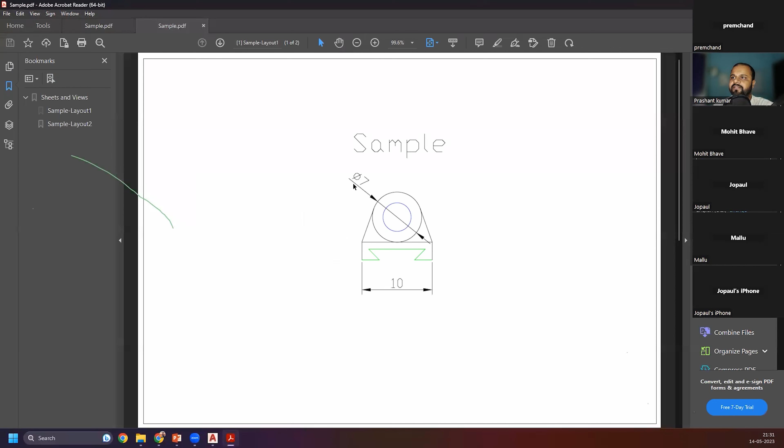So let me check on my desktop whether we got the published result or not. So you can see we just got our published result. This is page 1 and this is page 2. So these two got automatically printed without printing any of those drawings separately. So let me know if that answers your question.

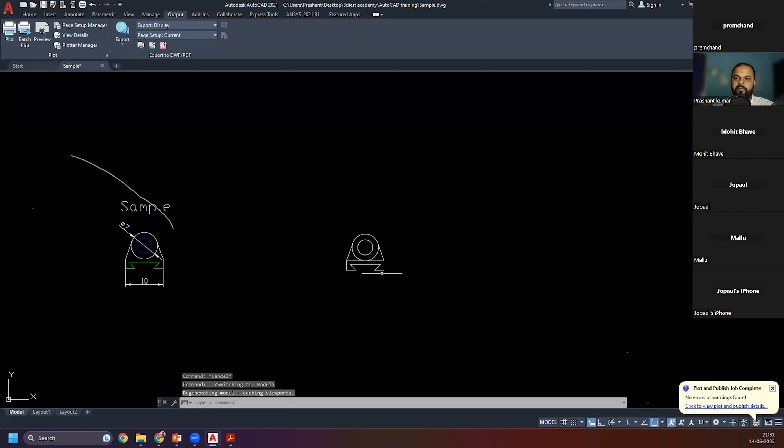Yes, sir. But if I have to do it from the window, not from the layout, directly from the model, then is it possible? No, it's not possible, because I told you the model space is completely for creating a drawing. And if you want to print anything from the model space, the only way is to specify your window. The only way is to specify your window, and that can only be done manually. Okay.